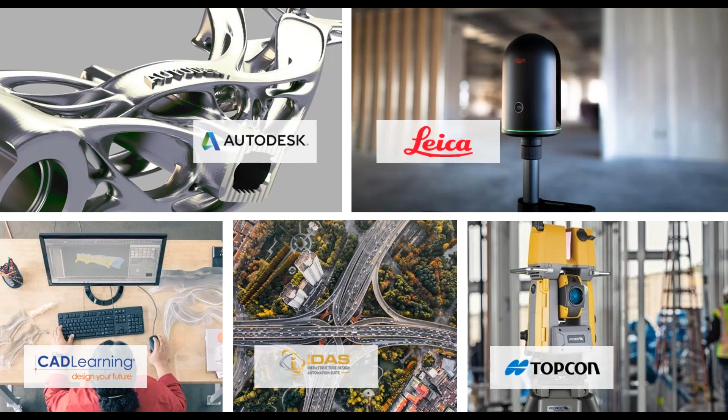Baker Baynes consults in the following industries: build, civil, energy, manufacturing, and process plant and mining. Helping Baker Baynes to success and enabling the consulting work that we do is the support of leading technology that we have chosen to represent. The main brands include Autodesk, CAD Learning, IDAS, Leica, and Topcon.

iAdopt is our unique approach to ensure successful digital transformation, resulting in the adoption of technology and processes within the architecture, engineering, construction, infrastructure, manufacturing, and process plant industries, with the only intention of helping you to design a better world.

In our previous digital capabilities webinar, we asked you what you would like to know more of. Collaboration was the most voted topic, so therefore we will discuss this in further detail today.

Our customers are more distributed than ever in the way they work and the people they work with. Maybe you are an engineering service provider using Inventor or SolidWorks, or an OEM contracting to the engineering service providers. Maybe you need to communicate with a job shop or an external team of industrial designers.

As we move into the era of connection, collaborating with external teams and better managing that collaboration should no longer be barriers to success. Most of our customers are experiencing the same issues, and the three most common issues are collaborating with external parties, protection of intellectual properties, and role-based access control and security.

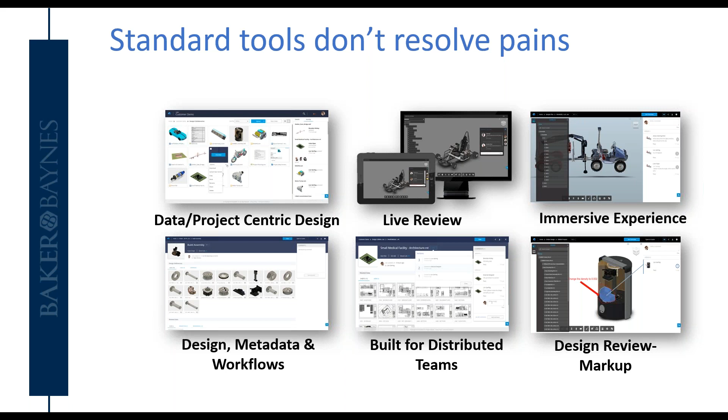A360 is the leading cloud-based platform that places powerful collaboration tools in the hands of designers, engineers, and general contractors. No matter where you are or what device you own, A360 enables you to securely view, share, review, find, and manage every kind of data, communication, and task associated with your project in one central workplace.

There are lots of tools that help you to share files, but none of them are like Fusion Team. Fusion Team makes it easy for anyone to open, view, and comment on 3D files directly in their web browser. With Vault, you can collaborate easily with your colleagues within your firewall. Adding Fusion will then make it just as easy to collaborate with external customers, suppliers, and design contractors.

There are 3 new capabilities we are adding to facilitate external collaboration. The first one is about share and collaborate on visual representation, all in one place with shared views capabilities. This is related to a review process of design files with external collaborators like customers and manufacturing suppliers.

The second capability is about a one-time manual share of 2D and 3D design data deliverables with customers and suppliers using Autodesk Drive. And the third capability is about bidirectional triggered design data exchange. This supports external design collaboration with manufacturing suppliers and external consultants.

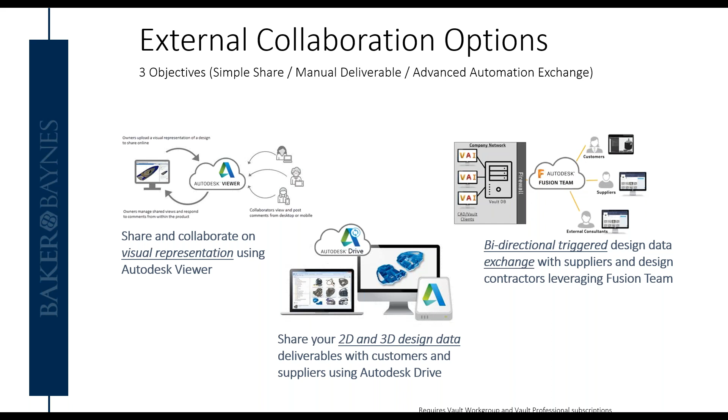Shared views are helping customers address a very specific challenge they have been facing so far: to gather feedback during a review cycle from customers and suppliers. This is a very simple user-friendly solution, allowing them to share a representation of the design with external collaborators and gather information without the need to share intellectual property, nor having the customers deploy additional applications or viewers.

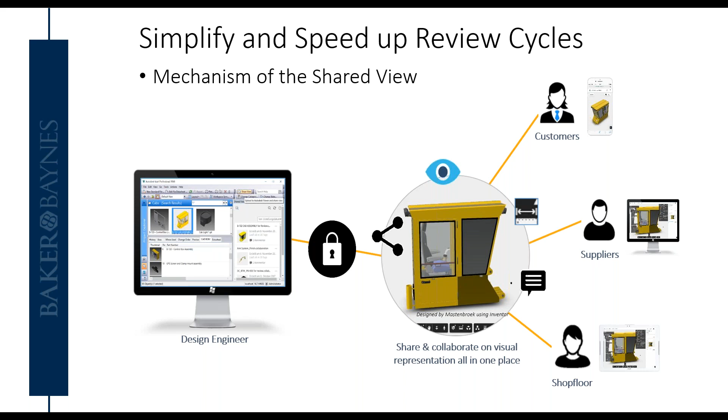For example, create a shared view for a customer to request approval or to provide easy access to the field sales team for on-site presentations. Using the link the engineering team provides, anyone can view and comment on the shared view. An email is sent to the design engineer when anyone comments on the shared view. He views and replies to comments and manages the shared view directly from Vault.

The workflow will look as follows: the design engineer will publish his views and share them. He will forward it to the reviewer, who will access the views and place his comments. It will be sent back to the design engineer to resolve those comments and reply, all in one space.

File formats that are supported are your normal Inventor and AutoCAD files: IPTs, IAMs, IDWs, and DWGs. It's for AutoCAD Electrical, Mechanical, and Civil 3D.

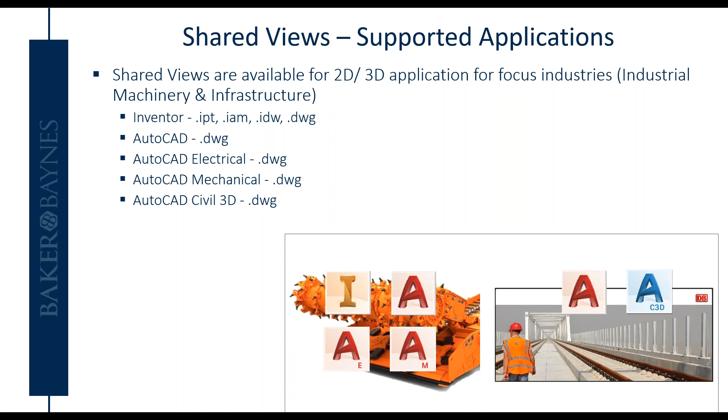Let's look at the demonstration explaining shared views.

We will choose a model, right-click and choose Share View. In the Create a Share View dialog box, I'm going to untick Hide component names and Hide part properties, then rename the part to Jet Engine. Click on Share and wait for it to be uploaded.

The Share View Complete dialog box will open, saying the upload was successful, and asking if I would like to view it in the browser or copy the link. I'm going to copy the link and close the window.

On the right side of my Vault application is a pane for shared views. I will refresh, and the Jet Engine with all the information will be displayed.

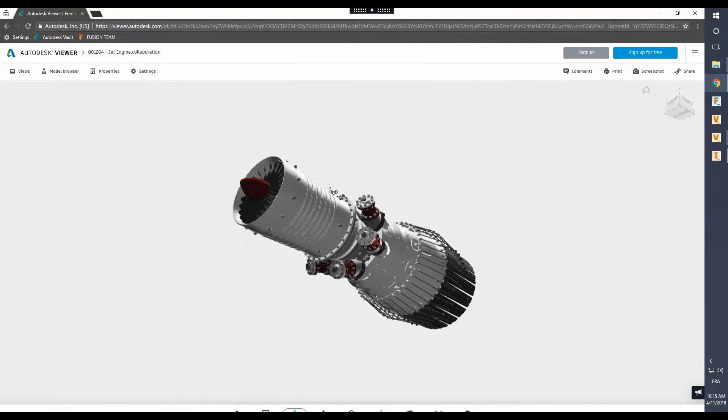I will now open the part in Autodesk Viewer as an external party. I can move around, zoom in and out, and explode the part to show all the different components.

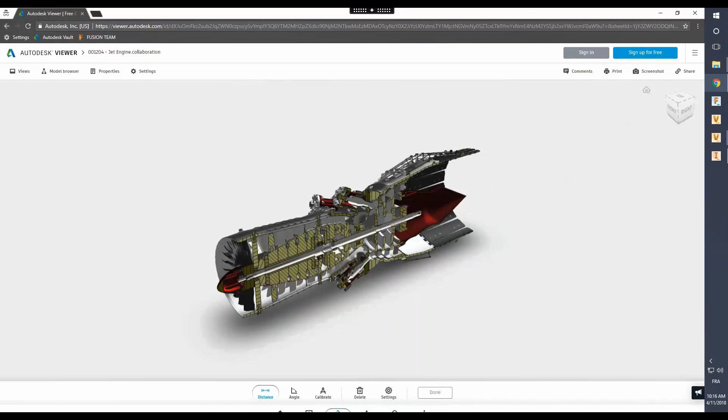I'm going to make a sectional view, and I want to measure the shaft. I can highlight any components, and I can see all the properties, even verify the link where this is saved.

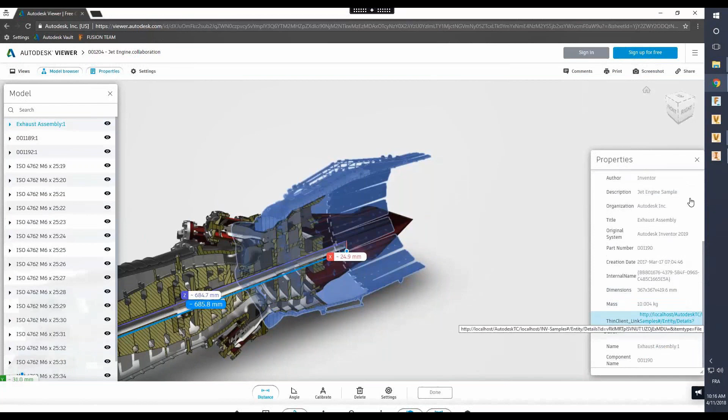I would like to make a change to this, so I'm going to add comments. It asks me to sign in to my Autodesk account.

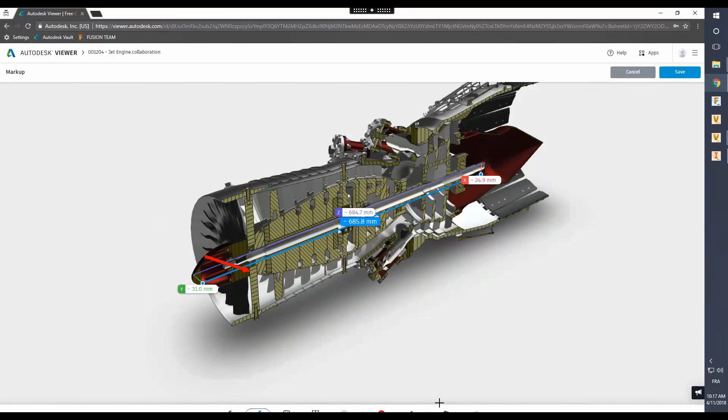I'm going to click on Comment and Markup. In the Markup toolbar at the bottom of the page, I will select an arrow to indicate what component it is that I want to change. I'm going to add a cloud with instructions.

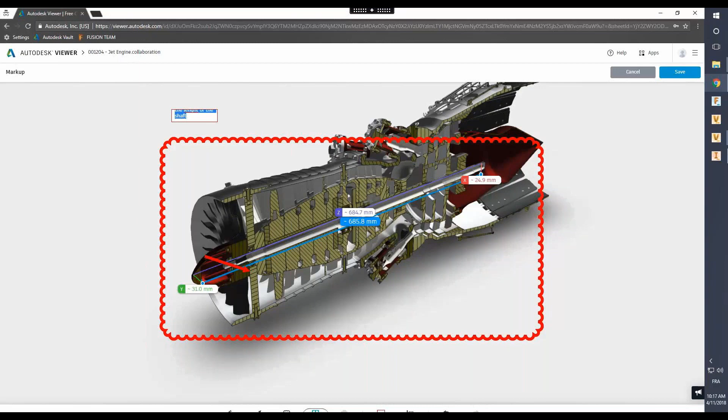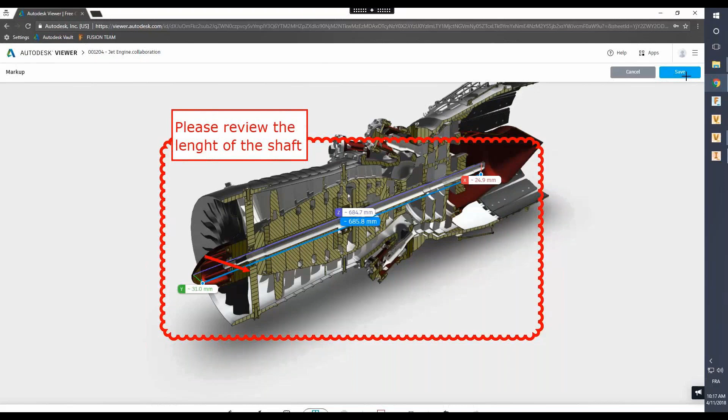This instruction is a bit small, so I'm going to change the font size to make it more visible, and save. When I refresh the page, the comment will appear.

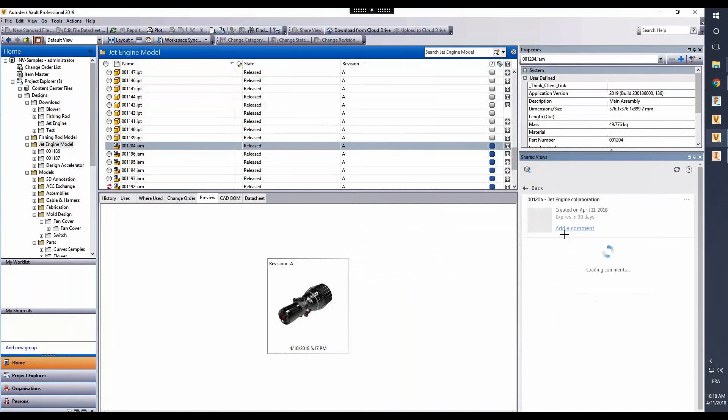Now I'm going to go back to my own workspace in Vault. I will refresh the page and see that there is a comment for me to tend to. I'm going to apply the markup and reply on the comment so the external party can now approve the updates.

When sharing views with the shop floor, the thin client can be used. Information like the bill of materials can be accessed by them, and it is as easy as creating a web link property and mapping, and adding the thin client link.

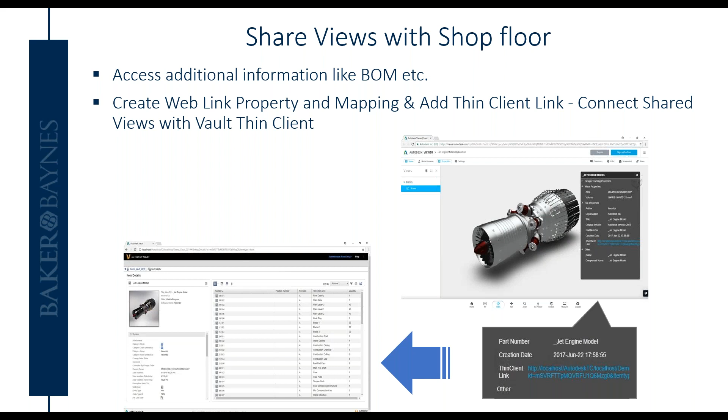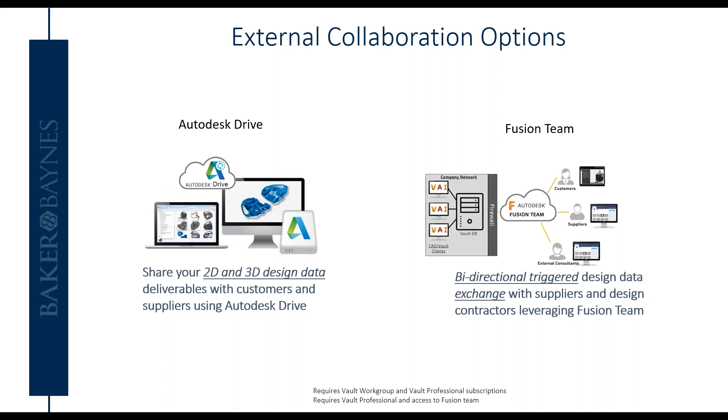Two of the new capabilities are also the tools we will use for external collaboration. Drive is about a one-time manual share where 2D and 3D design data deliverables are shared with customers and suppliers using Autodesk Drive. The bidirectional triggered design data exchange will support external design collaboration with manufacturing suppliers and external consultants. The difference between Autodesk Drive and Fusion is as follows.

With Autodesk Drive, you have a subscription benefit for individual Vault workgroups and Vault Professional subscribers: 25 gigabytes of storage. It's a simple solution with low barrier to entry for design sharing with customers and stakeholders.

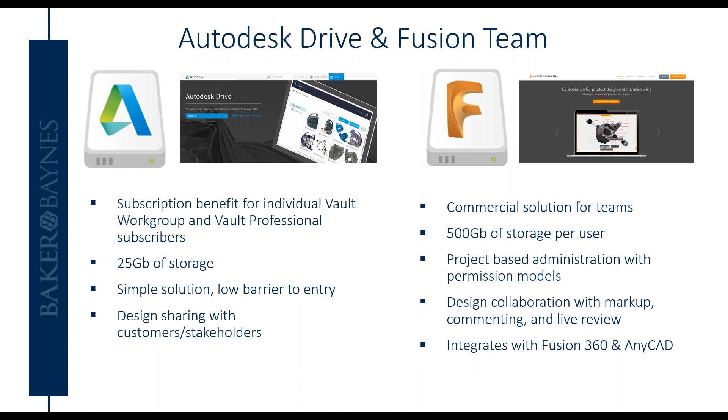In Fusion, it is more of a commercial solution for teams: 500 gigabytes of storage per user, project-based administration with permission models, design collaboration with markup, commenting, and live review, and it integrates with Fusion 360 and AnyCAD.

Fusion Team addresses fundamental design communication and collaboration problems. Fusion Team is a CAD-aware cloud storage solution for casual collaboration. Use Fusion Team instead of basic cloud storage tools like Dropbox for publishing and sharing your design review documents.

Since Fusion Team is CAD-aware, your team can view 2D and 3D models instantly. Use Fusion Team to publish instructions and documents to provide to the shop floor. Fusion Team keeps all your projects in one place.

Autodesk extended the pack and go capabilities to make it easy to deliver native data outside the firewall by integrating Autodesk Drive and Fusion Team. This helps engineering teams deliver the actual CAD data to external collaborators.

The steps are as follows: first, the project manager creates a project inside Fusion Team or Autodesk Drive. Then the design engineer selects a file or multiple files from the file list, the Uses tab, Where Used tab, or the Quick Search, and then selects Pack and Go.

The Pack and Go command collects the file and all its reference files into a single package. Note that all files that are referenced are included in the package. In the Pack and Go dialog box, design engineers are able to select the type of package to create as well as the package destination.

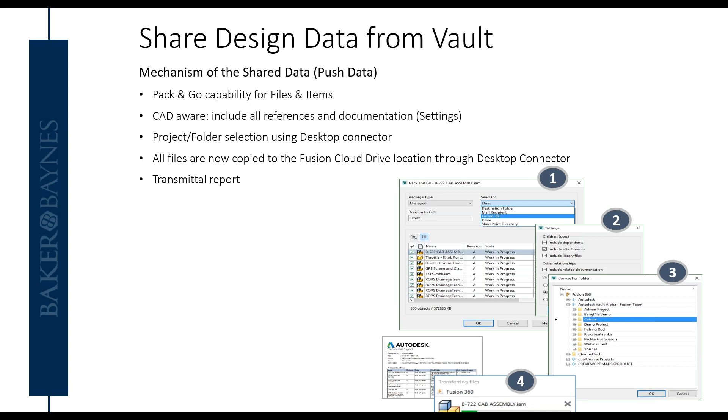Working with Vault customers around the globe, we see that more and more have projects that require design collaboration outside of the firewall. They share design data with manufacturing partners, suppliers, and even end customers at all project stages, from concept to delivery. We are going to look at 3 challenges.

The first one is when a customer needs an easy and triggered way for design engineers to share project-related, up-to-date release design files with outside suppliers or customers for consumption. This is required to be triggered and not based on user interaction.

The second use case is that a customer would like to outsource some CAD files and their references to other companies so that they can clean up the assemblies and create the drawings and get them back to Vault without loss of any CAD references. This enables round-trip design work.

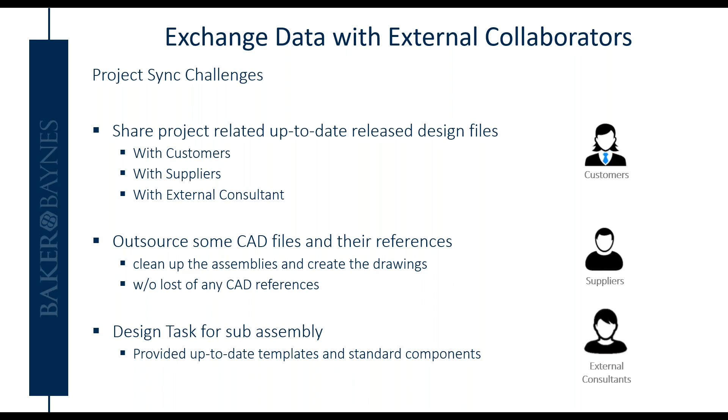The last use case is when a customer would like to contract external firms with design tasks for sub-assembly due to time constraints, leveraging available up-to-date templates and standard components managed in Vault.

Today, customers address such challenges by using email, copy data on FTP sites, Dropbox, OneDrive, or Box. However, all these solutions are not CAD-aware and can't handle properly CAD references. This leads to a loss of information. It is essential that the right CAD files are made available at the right time, and that they can be exchanged with ease regardless of the size or the number of documents.

Leveraging Vault Professional and Fusion Team, customers will be able to share design files with authorized external collaborators like customers, suppliers, and third parties, increasing satisfaction and transparency and decreasing losses from miscommunication. All you need is to configure once which data is to be synchronized and let Vault care about keeping all stakeholders up to date and collaborate on the latest version.

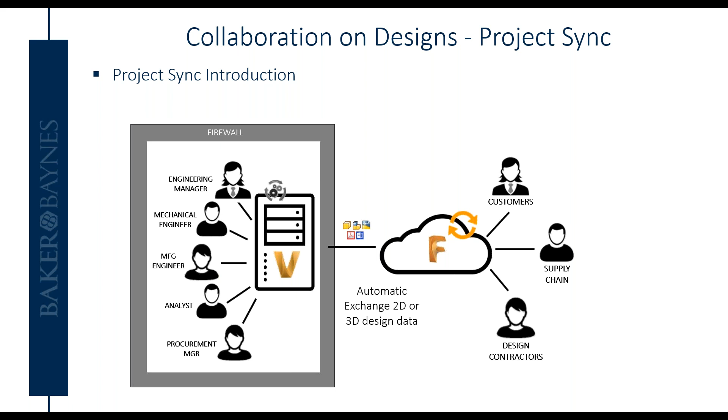You need to define as much Fusion Team Hub project mapping as necessary for different collaborators or projects by mapping a Vault folder to a cloud location folder, leveraging the desktop connector. Each collaborator has access to a specific project in Fusion Team. The admin can configure the synchronization to work in either direction or both directions.

In addition, the admin can specify when the synchronization should occur at a scheduled time each day. For example, should it occur at midnight, or should it occur at specific time intervals, like every 8 hours or 12 hours? And you can even choose none, which means upload or download will be triggered from the user on demand.

For CAD awareness and link support, Vault recognizes Inventor file references, as well as drawing XREFs, and automatically adds them to the sharing package with external collaborators.

Also, to make sure the release data and related files associated with that particular revision are preserved and synced, turn on upload related files based on release-biased options. Not only the files in a folder are collected, but also all linked files. This supports customers to exchange project-relevant design data independent from where the files reside.

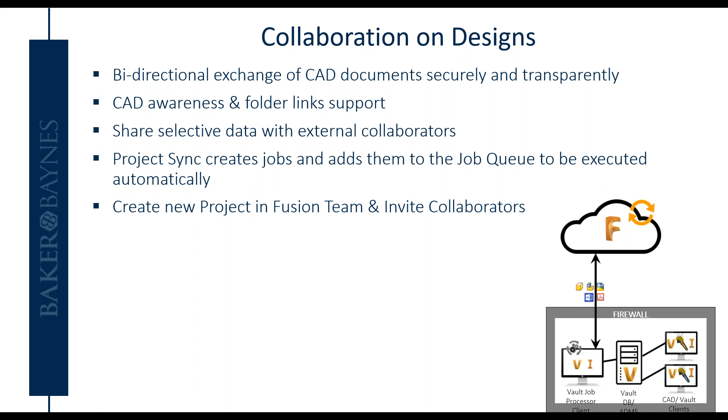We will be looking at 3 examples in secure and selective exchange of CAD documents: one-way user-driven sharing, triggered file sharing, and shortcut file sharing.

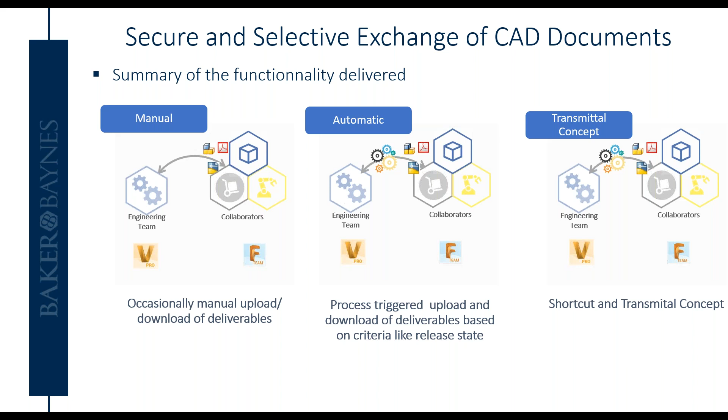Example 1, one-way user-driven sharing. You need to configure the admin by defining the cloud drive mapping and setting up the cloud folder. For user interaction, you need to set the manual upload to cloud drive and select the virtual cloud folder where the files should be saved, and then set the job processor to run as per your requirements.

In example number 2, triggered file sharing, you once again need to configure the admin by defining the cloud drive mapping and Vault folder mapping for sharing. For folder mapping, you can add trigger based on sync settings and filter out design data to be shared. With this example, there is no user interaction, and then set the job processor to run as per your requirements.

Example 3, shortcut file sharing. You need to configure the admin by defining the cloud drive mapping and Vault folder mapping for sharing. For folder mapping, you can add trigger based on sync settings and filter out the design data to be shared, but also enable upload related file, copy paste as a link, and assign a category. And then set the job processor to run as per your requirements.

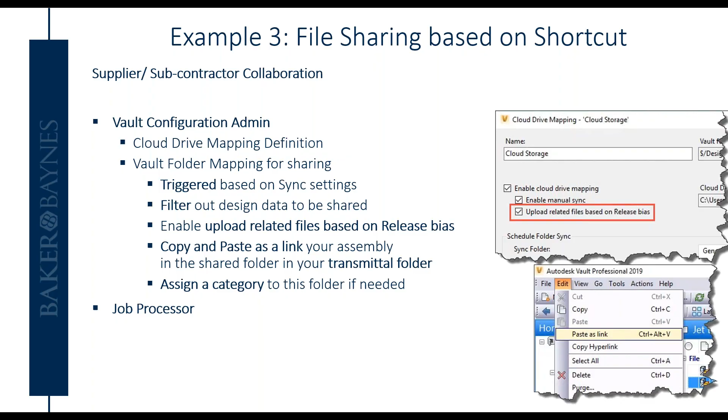So in summary, we've seen now how we can collaborate with external parties while protecting our intellectual property and give role-based access or permissions to control our security.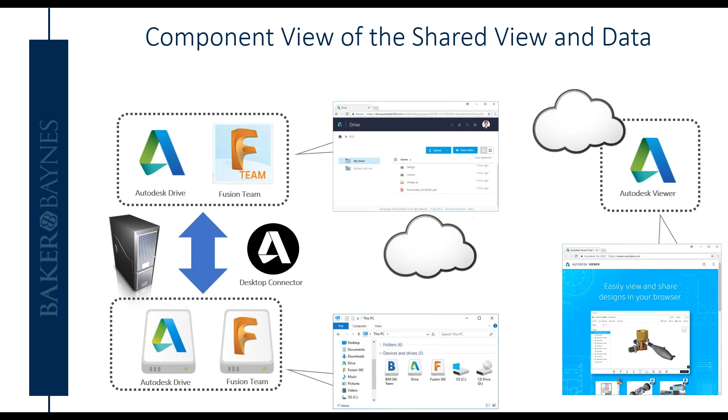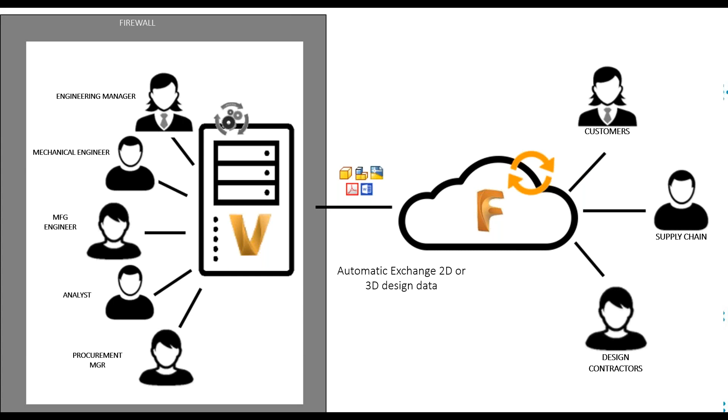Our customers are more distributed than ever in the way they work and the people they work with. Maybe you are an engineering service provider using Inventor or SolidWorks, or an OEM contracting to the engineering service. Maybe you need to communicate with a job shop or an external team of industrial designers. As we move into the era of connection, collaborating with external teams and better managing that collaboration should not be barriers to success. Did we solve the issues of collaborating with external parties?

Yes, by sharing configurations set to projects with live collaboration. Links are maintained via the share with Autodesk Drive and Fusion.

How did we protect our intellectual property? By controlling sharing permissions, we can control what files are shared and role-based access control and security by granting file access to only shared files with editor or viewer rights, not the entire vault or file store.